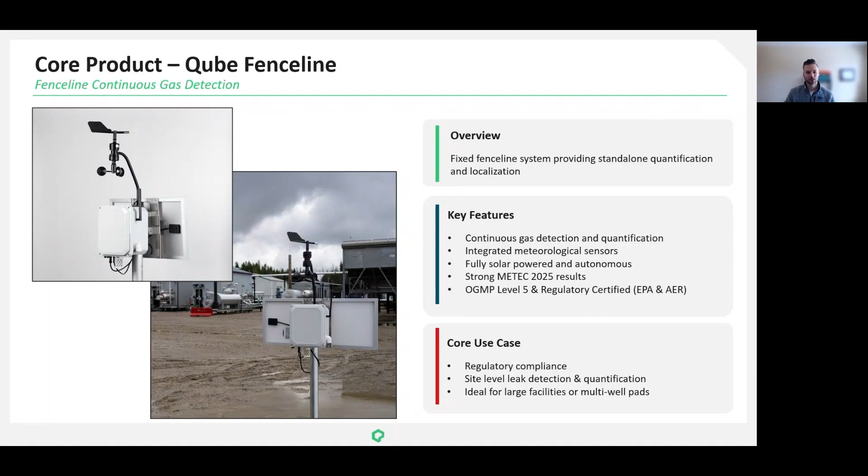So those METEC 2025 results, I don't want to spend too much time on this. We have blog posts and a lot of other resources that dive deeper into this, but at a high level, the three key things that we think help drive home the performance of the model is detection. Do you detect gas through time? So the METEC 2025 results were over 3 months.

It was a very challenging release. They did 0 to 20 kilogram per hour release rates, and at certain points in time, 8 to 10 concurrent and simultaneous releases. So how we did on detection, we hit over that 3-month period, 98% of the time we had the correct detection - that was either a true positive or a true negative. And that's what that bottom left graph shows, our breakdown of time through that 3 months.

So detection is great, but you then need to be able to localize properly, which then feeds the quantification accuracy. So in the localization, we also scored very well. We had 97% localization to the group level.

And then finally, on the quantification side of things, across that 0 to 20 kilogram per hour rates, we compared our estimations for those rates versus ground truth. And what you can see in that graph on the bottom right, that's the distribution around the ground truth for our predictions, and the blue dots are mean. Across the board from the 0 to 20 kilograms per hour, we were within 1 standard deviation of error. So again, really strong results. We have a lot more resources that dive deeper into this.

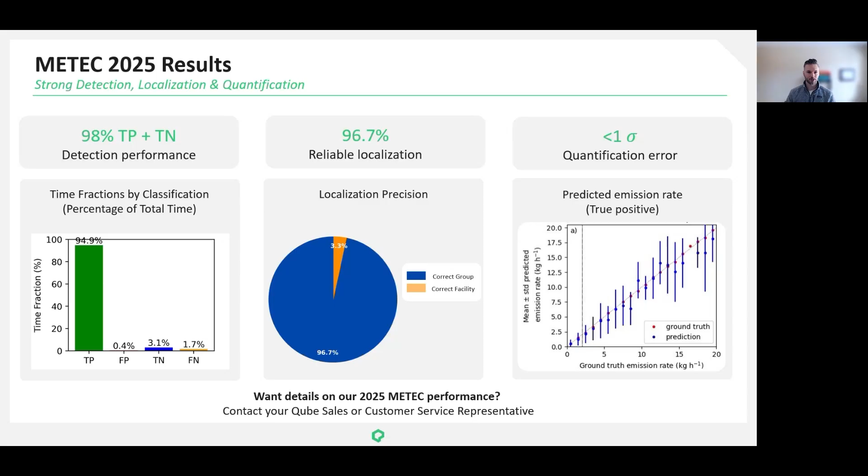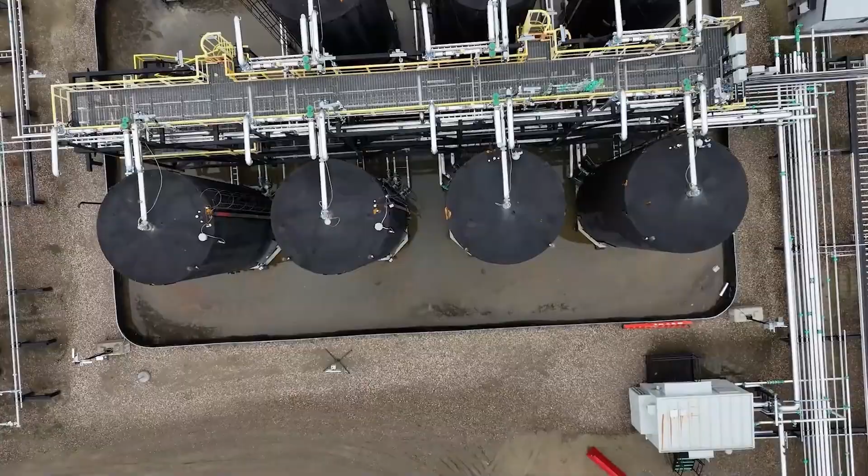All right, so new products. The other product that we've recently been marketing and deploying in the field now is our Qube Lite. Some of you might be familiar with this product. This is a source level continuous methane detection device. It's intended to be put directly into your facility around high value or high critical release points. Key thing with this is it's a compact methane detector, so methane only. It does continuous monitoring, and it's intended to be deployed right at critical sources.

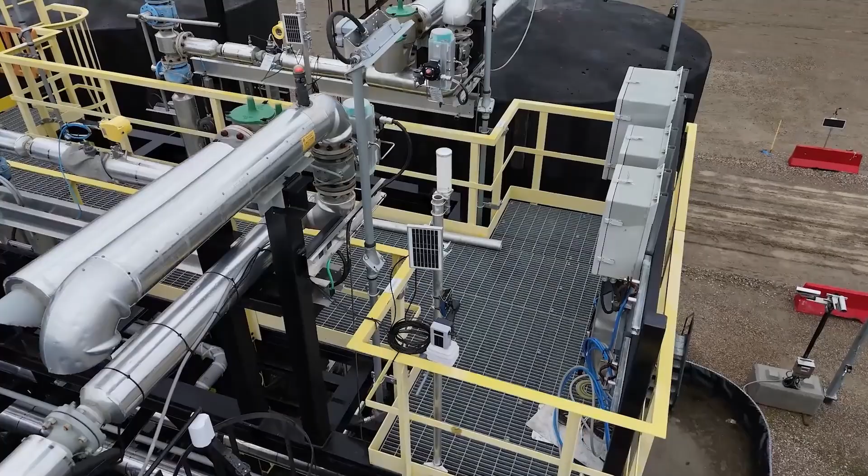So for that to be the case, it has to be intrinsically safe. It's C1D1 rated. It's standalone and autonomous, so it's solar powered, and it's extremely low cost. So again, this device's primary use case is for tank venting or single well sites - marginalized sites where maybe it wouldn't make sense to put a Qube Fenceline. This is where the Qube Lite could shine as well.

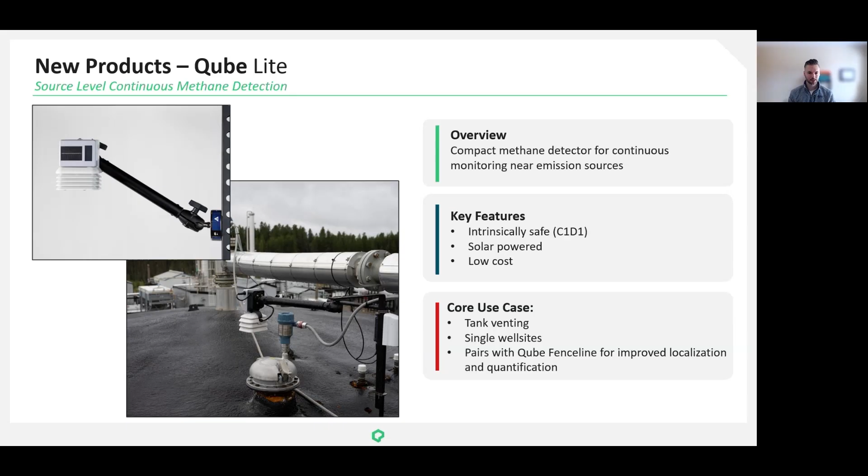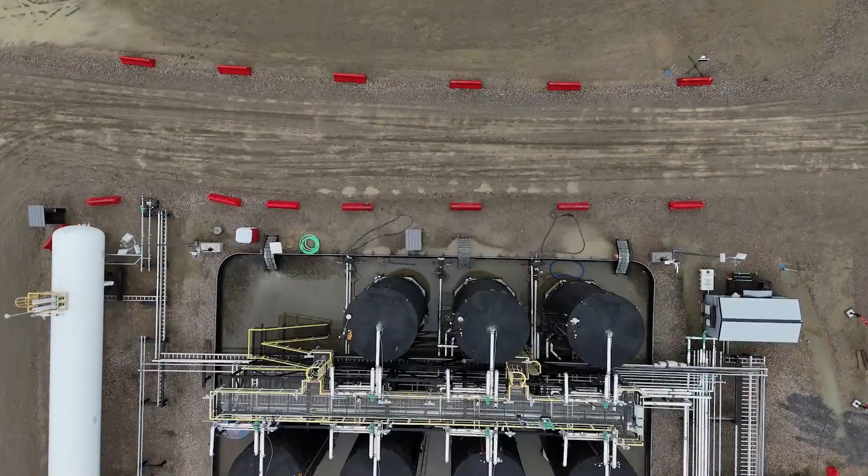Now, again, it can be a standalone device for detection of just key sources, or it can be paired with our Qube Fenceline, which we're currently in the process of rolling out a model that will utilize both the Qube Lite and the Fenceline for quantification and localization.

Our next product is our Qube camera. This is a relatively new product we just came out with. The key thing on this camera is it's non-OGI, non-thermal - it's a visual detection only camera. The main purpose is to provide visual context across your site and identify activity and events going on. It's an HD camera, 1080p resolution.

It can do periodic scheduled events or event-triggered capture. It has an AI model that can detect certain objects of interest, such as personnel, vehicles, flaring, and so forth. The key focus is that it's standalone and solar powered, so it can be deployed anywhere on your site very quickly and easily.

The main use case is monitoring your site activity - any access, flaring, trucks, personnel, truck out. But it also pairs well with our emissions detection products, and it can help provide additional context to emissions, or what was going on at a site during a big emission. We have some examples that show this.

Lastly, this is a very new product that we're in the process of developing - I don't think we've marketed much on this at all - the Qube IoT sensor network. These would be very low cost process sensors that can be installed at remote sites and enable remote SCADA-like monitoring through a cellular gateway.

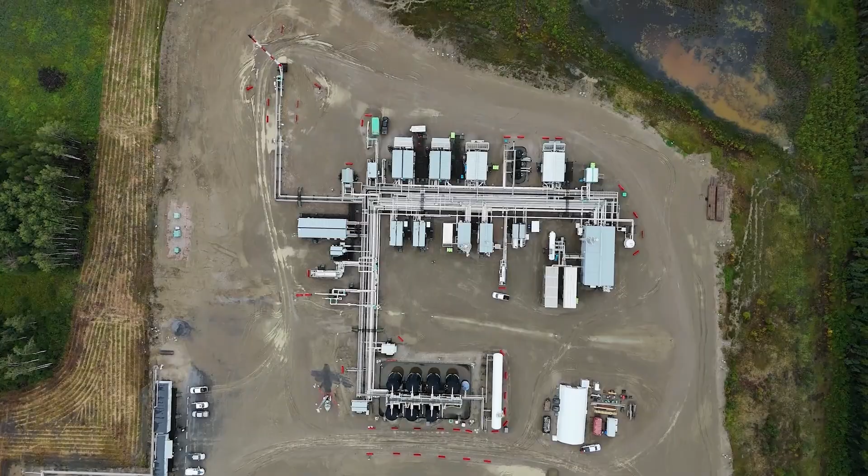They're very low cost and can provide near continuous process data. These sensors will focus on pressure, temperature, level, and vibration to start. They're intrinsically safe, so they're C1, D1 rated. The communication is Bluetooth between the sensors and the gateway, which uses cellular to the cloud. Multiple sensors can be connected to each gateway.

This data would integrate with the Qube platform, can be visualized in the platform or pulled via export or API. Further down the road, the gateway is compatible with several other communication types and sensors - not limited to those four we mentioned, but it can communicate with Bluetooth, Modbus, UART, I2C, or digital analog. So a lot of opportunity to connect with various types of sensors.

The way we view this core use case is those marginalized assets where traditional instrumentation is not cost effective. These devices can monitor your tanks, compressors, pumps, your wells, and focus on monitoring equipment run status, normal operation, and especially venting. Pressure is a great indicator for releases or venting, so it can be a great tool to provide indication of a vent going off.

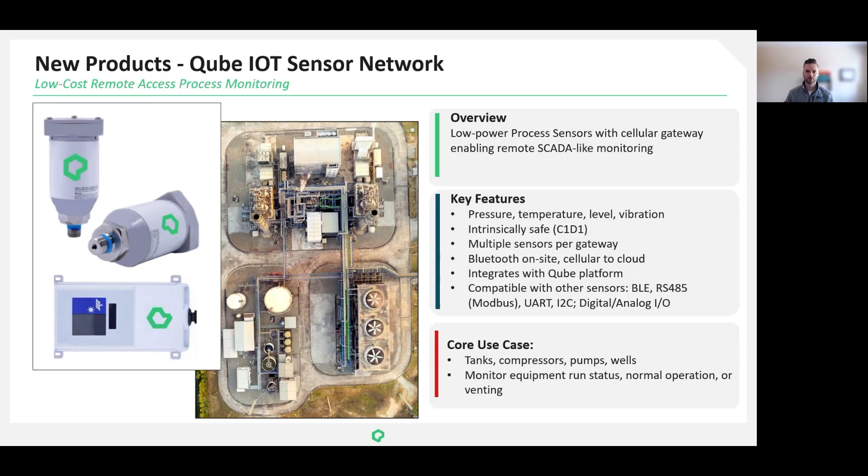Okay, so the next thing I'd like to jump into is our platform. I'd like to showcase a couple examples of how our products work. This is our demo environment. First, I'm sure some people might not be familiar with our site dashboard, so I'll do a quick overview of that, and then jump into an example that showcases the Qube Lite and the fence line together.

This is a test facility - a real natural gas facility that's allowed us to deploy our products and test their performance. On the site dashboard, the first thing you'll see is a map in the top left corner. That map has a drone image overview of your site, and on that image we overlay sources and our devices.

The sources are these black dots, and you can see them all over the site - these are the sources we've identified. The colored icons are the Qube devices. There's a lot of Qube devices here - this wouldn't be typical for deployment, but we've put so many on this site just for testing purposes with this test facility.

On the map, you can see these icons on the top left - these are icons that allow you to improve the visualization of the site. For sources, I can toggle on source icons to see what types they are - these are all tanks, these ones down at the south are compressors, and these are separators and so forth. I can also toggle on device labels, so if I'm looking for a particular device, I can toggle these on and off.

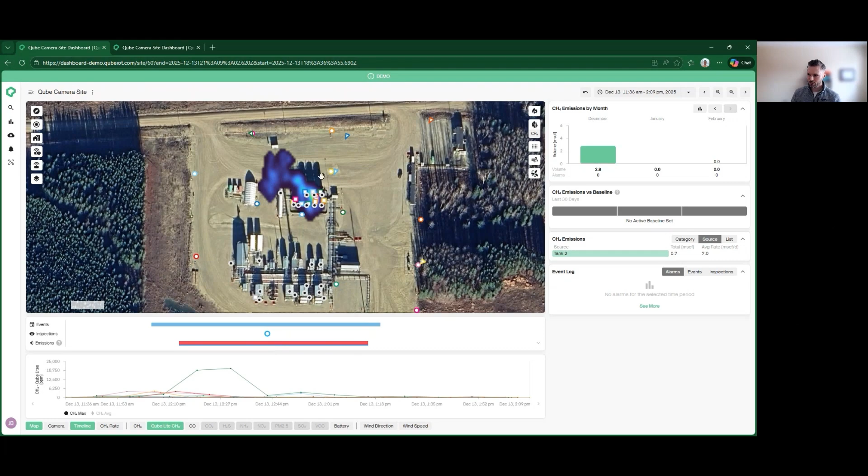The next thing you can add are third-party inspections. For this site, we have an aerial inspection, shown by this blue dot. If I hover over it, you can see the plume that was provided by the aerial provider. You can upload your aerial inspections, your KMZ files, or images, and we can overlay and show them on the platform. You can persist that or toggle it off, and you can also go in and edit the details of that emission.

And then lastly, we have the emissions. This is the output of our quantification model. Anytime there's a detection, we create an emission event, and those time-bounded events can be summarized and rolled up into this timeline view.

Underneath that, we have buttons that allow you to toggle on more time series views. If you have a fence line product, you could toggle on the CH4 rate. This is the quantification model output through time, with various averaging periods you can view the data. Then we also have the raw data for the devices. I'm showing the Qube Lite CH4 because that's the example we'll go into, but you can toggle on the CH4 for the fence line.

You can see the actual raw data that was detected through time, same with the Qube Lites. Any of the other gas sensors installed on the device, you can toggle them on. You can also see device battery, wind direction, and wind speed from the fence line devices.

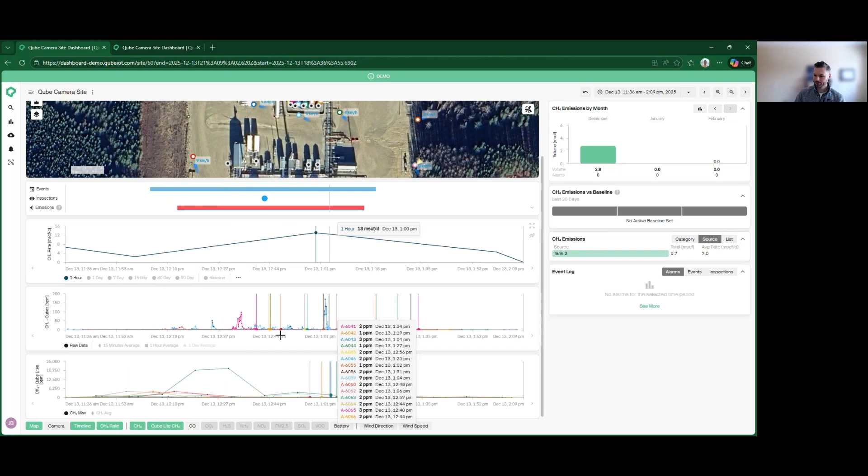On the right side, we have rolled-up widgets that show the summarized emissions performance through time. The first is our emissions by month, your total emissions by month for the site. Because this is a demo environment, we only have one month shown, but normally you'd be able to move through time and see your other emissions volumes per month.

We have an emissions versus baseline widget. If you set a baseline for a site, which we always recommend, this shows you the performance of your emissions relative to baseline for the time period selected. Lastly, we have an emissions rolled-up summary table, which groups your emissions by source groups, like tanks versus separators, compressors, and so forth, specific sources, and then just a list of your emissions.

And then lastly, we have the event log. This is essentially the event timeline down here, shown in tabular format, where you can see the specific events. You can come in, open, and see them. You can edit, change the events, and you can add a new event in here if you want.

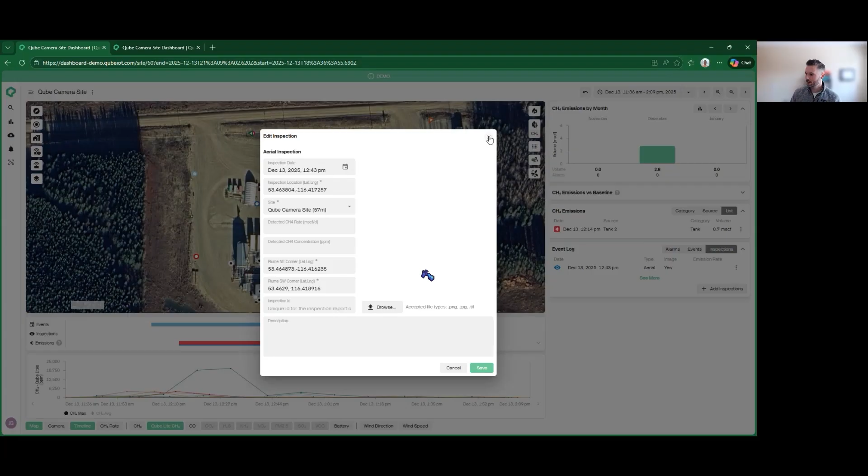Inspections as well - you can come in and see your inspections, edit your inspections, and add new inspections. So you can add a new aerial inspection: load a KMZ file or manually add an aerial inspection with all the information in the plume and upload your aerial image. Or you can add survey inspections, OGI or AVOs, add details on whether a detection was found, and add an Excel file.

So that's the overview of the site dashboard. I know that's quite a bit, but if you'd like to get more info, you can always reach out to your Qube customer service rep.

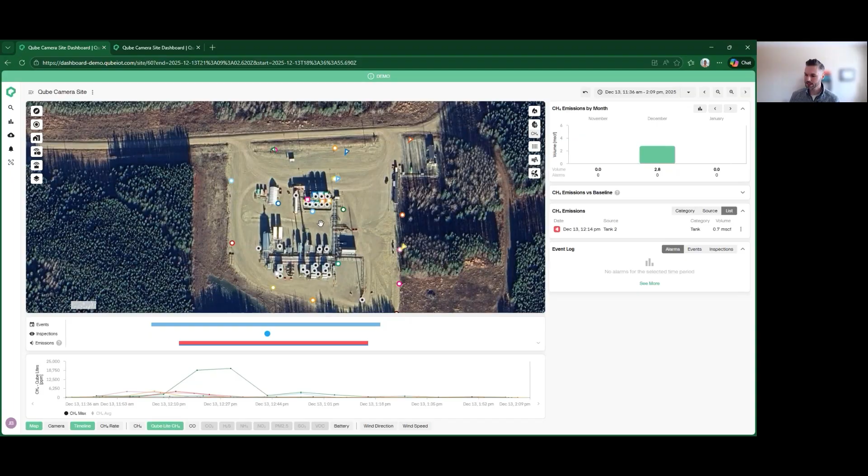Now I'd like to dive into a specific detection scenario at the site. The example I'm focusing on is a release from the tank farm, specifically this red emission event. What I want to show is if you were using Qube Lite on its own — obviously we have all the detection technologies, but if you were using Qube Lite alone — there's a release from the northeast on these tanks.

We have several Qube Lites on the tank farm. What you can see here from the Qube Lite PPM chart is a clear pickup of concentration across the Qube Lites on the tank farm.

One of the key features on the visual on the top right is we can turn on something called concentration roses. This lets us visualize the raw data of CH4 detection from the devices. The rings around the Qube Lite show the concentration hits, and the magnitude is shown by color. What you can see here is that during this time period, we had several detections on these northeast corner Qube Lites, and the PPM concentration also aligns with that.

In this instance we didn't have an alarm set up, but you are able to set up alerts on each Qube Lite device based on concentration. So if you had Qube Lite only, you would have been able to alert on this PPM detection from the tank release, generating an alarm that could send a notification to your operations teams. This would be PPM only, but it still would have captured the detection.

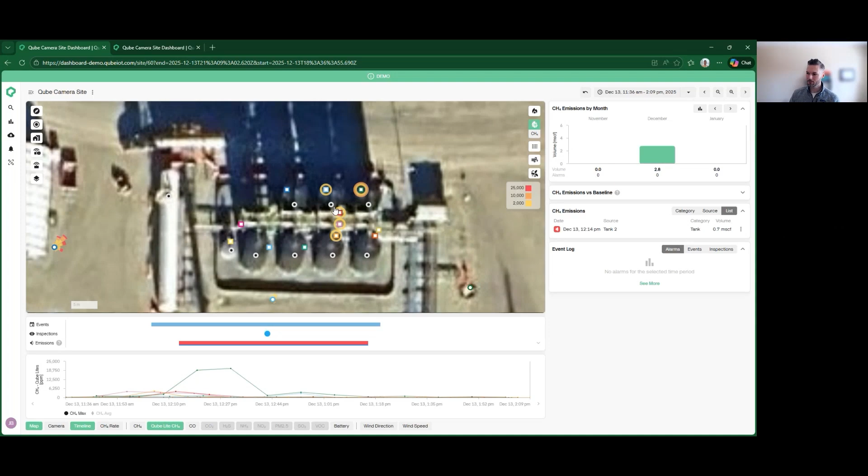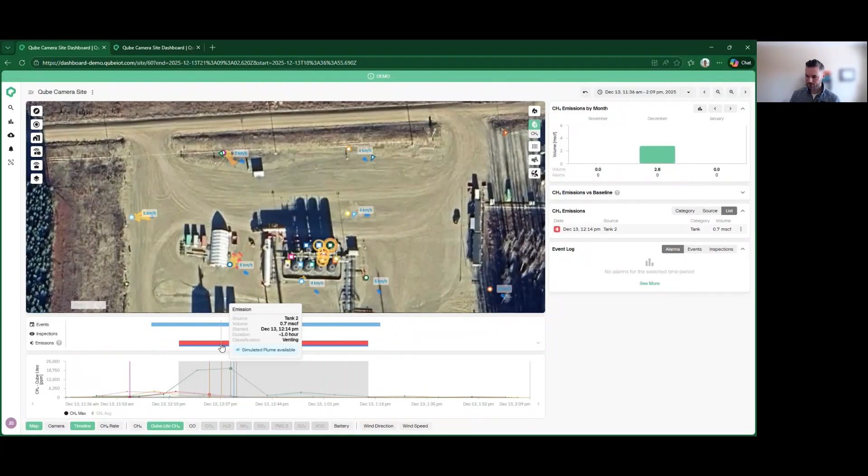Now zooming back out, I wanted to show how our fence line also performed in conjunction with it. If I turn off our CH4 and turn on our fence line PPM, what you can see here is we also detected fence line concentration throughout — these are the circular devices on the outside perimeter of the tank farm, and they also picked up that release.

On the concentration roses here, the fence lines show these triangular kind of circles around the devices, which indicate the direction they were getting concentration hits, while size and color show the magnitude. One cool feature from a UI standpoint is you can hover on these and it projects the cone further down on the site.

What we usually recommend is you click and toggle these on, and you can toggle on the top cones from all the devices that had hits, which were these western devices. You can see where all the cones overlap — that's typically where we're going to localize to.

The cool thing is if we turn on the heat map, another feature we have at the top right, it visualizes where the emissions were localized on the site. You can see that's exactly what happened — we localized to tank 2 with our quantification model.

So fence line on its own was also able to detect the event, same as the Qube Lites, and it quantified and localized to the exact same location. So both products completely standalone were able to quantify and localize to the tank farm.

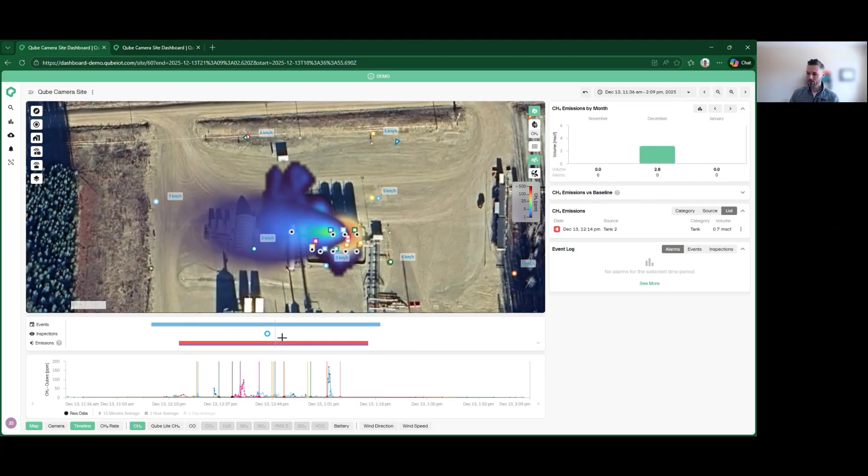If I toggle on that inspection from the aerial flyover, it lines up quite well with that plume. We think all of these features combined together give really great context to the operational team to understand what the Qube model was doing and what we think was going on at the site. Two different products detecting the same thing. We think that's a really great example, showcasing how the Qube Lites on their own can work, how the fence line on its own can work, and how they all work together in conjunction in the platform.

The next feature I want to go over is an example of our camera. In this example, I want to zoom in on the tank battery or tank farm. We have 3 emission events that you can see in our timeline. These emission events were all localized with the heat map showing as tank 4, to the west of the tank farm.

When we talked with their operations teams, there was no clear process data or indication that there would be an emission from tank 4 or from the tank farm, so we were kind of stumped on what was causing the emissions. Now, what we always say is we detect very well, so if there are concentration hits in detection, there is something going on at the site. We needed additional context, and that's where the camera came in extremely handy in this example.

If you have cameras installed at your sites, these triangular devices on the map, you'll have this button available to toggle on the camera timeline. If I toggle it on, you'll see this series showing a row per camera. This site has 5 cameras, and each dot is an image taken by the cameras. We can program the cameras for routine scheduled images, and they also do exception-based detection based off objects of interest. The spaced out dots are scheduled, and the more concentrated dots are periods of interest based on object detection.

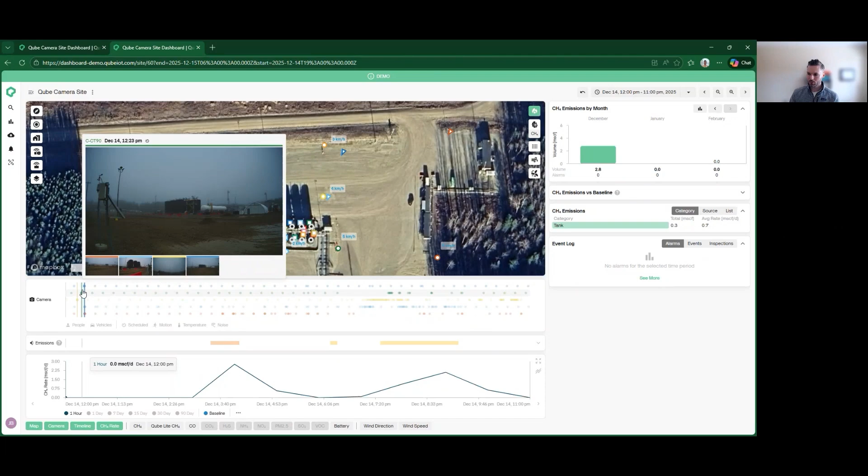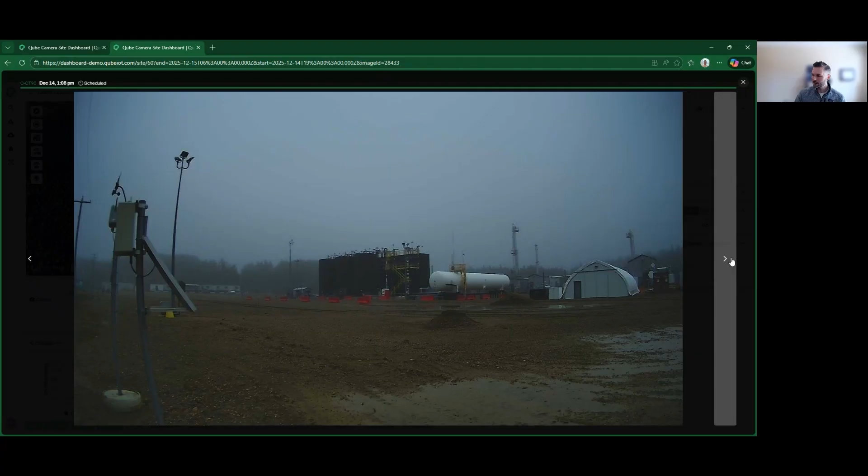If you hover on the camera, depending on which one you're on, you'll get this view of images from the cameras through time, and if you slide across you get the updated images. You can also click on the timeline and it'll pull up the camera you were on, then get a more blown up view of the images, which you can go forward and backwards through. Specifically in this instance, this is a lot of images to go through.

So you can filter to events of interest, and hovering over it brings to the forefront those images that meet that criteria. In our example, what stands out to me is I want to focus on the vehicles. Hovering on this, I can click to persist that view. The first thing that stands out is the light blue camera, looking at the tank farm. The second thing that stands out is all of the images from the light blue camera seem to align with those emission events.

When I hover over this, the first thing that stands out is there was a truck during every single one of these emission events. If I hover over this one, another truck. You can see the model is identifying it as a vehicle. There's clearly a truck at the truck out. Similarly for this much longer event - you'll have to bear with me, my computer can be a bit slow - but there's another truck.

So this additional context from the camera allowed us to relay that info to operations, which allowed them to identify that there was a small vent tank to the east of tank 4 that relieved during truck out. I had no process data on it, no indication, really no way of knowing if it was venting or not. But it allowed us to identify that there was in fact venting going on during the truck outs.

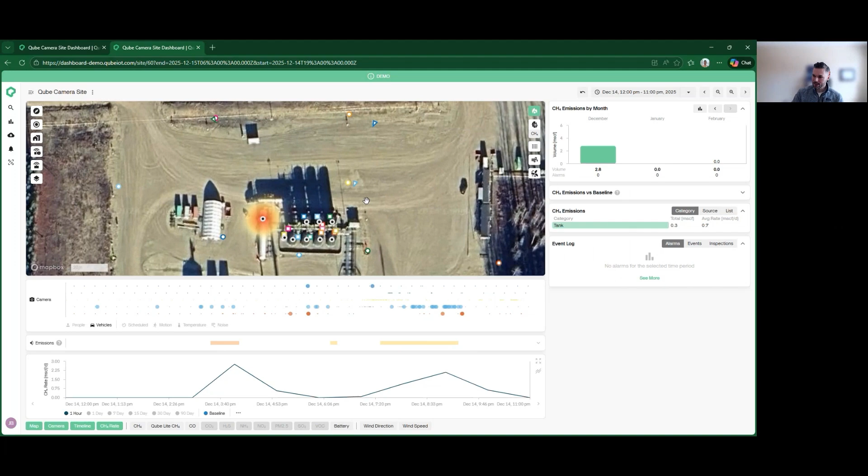So again, we think this is a great example. The cameras on their own could be standalone to just indicate when you're having trucks arrive at your site, or when there's vehicles or access occurring at your site. But again, when paired with the emissions data, it can add that extra bit of context to explain why there are 3 emission events that were previously unexplainable.

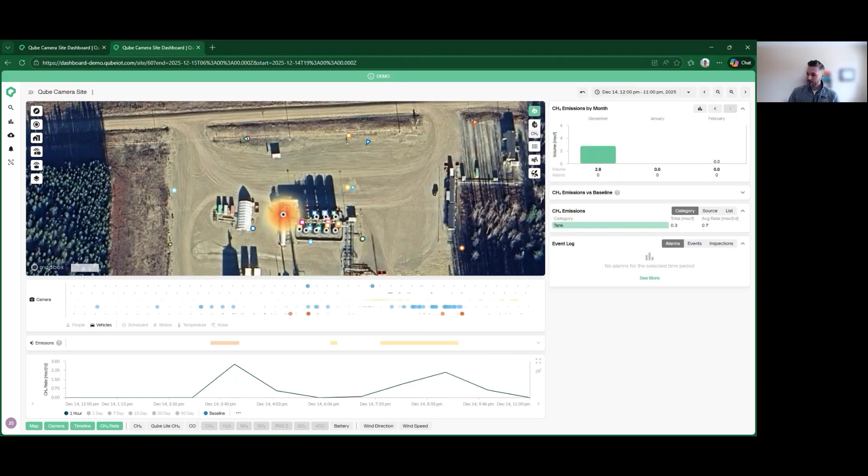So that's it for our platform demo. I'd like to now jump back into the presentation and go over a case study that ties this all together.

So again, this is another example from this test facility. This one combines all of our data plus process data at their site. This is an upstream natural gas processing facility. We have the 3 core products deployed: the fenceline, Qube Lite, Qube Camera.

And at this site, the example we're going to go over is a slugging event that happens at the plant. For those that aren't familiar, a slug is a plug of liquid that can come into the inlet of a plant. Typically you have gas and liquid flowing together in the inlet. Eventually you can sometimes get a large plug of pure liquid that hits a plant. These can be very hydraulically significant to a plant and cause a major upset. The extra liquid can cause a lot of liquid flow into the tanks, which can cause extra vapor and then potential venting and flaring. And that's exactly what we see in this example.

So they experience a slugging event from 1 a.m. to 1 p.m., and then they experience tank farm venting and flaring. And then what we want to focus on in this case study is the detection and response.

So we were able to capture the full event timeline. We used their process SCADA data to provide root cause insight into what caused the event, and we were able to diagnose and troubleshoot the event fully remotely.

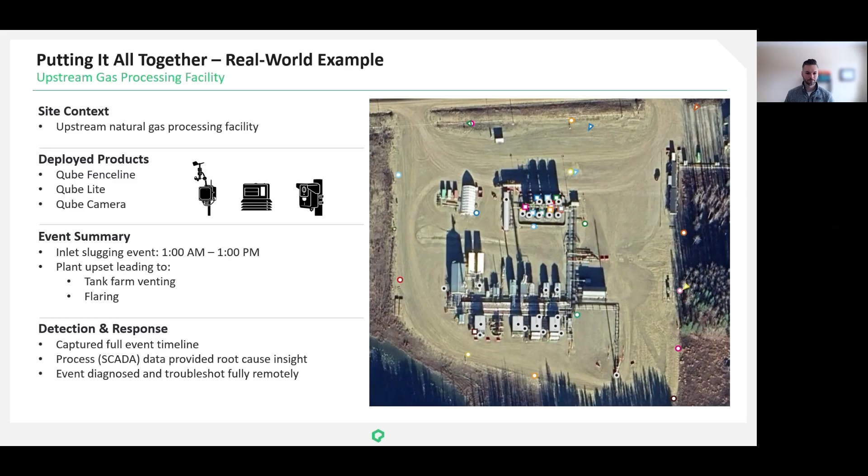So the first thing I want to go over is that process signal. Again, every major event at a plant, there's so much process data and SCADA data that can give you information. The key challenge is understanding what variables to look at to give you that information. I would call this the fingerprint of the event. Most of these events, if they reoccur, you would see the same signal in the data.

So for this specific example, to define the slugging event, we focused on 4 key process variables. The first item is the inlet separator water level. With a slug of liquid coming into a plant, you're going to get a lot more extra liquid and water into the plant. So you'll see that in the inlet separator water level with how frequently it dumps and just how unstable it can become.

The next item: extra vapors getting into the tank farm from the separator will feed the VRU suction pressure. So every tank farm has a vapor recovery unit. And if excess vapors get into that unit, its suction pressure can change or become unsteady. So monitoring that can be very helpful.

Next, gas plants are designed with a last line of defense to relieve any excess vapors or pressure to the flare system, and that's usually an indication of a plant upset. A very large slugging event would typically result in a plant upset, and you can monitor the flare flow to see if that's occurring. A slug is also a very hydraulically significant event. It can block off gas flow to the plant and cause major pressure swings, so a gas plant should run with pretty steady pressure profiles throughout. Monitoring the inlet separator pressure is a great indicator of a plant upset or a big slug.

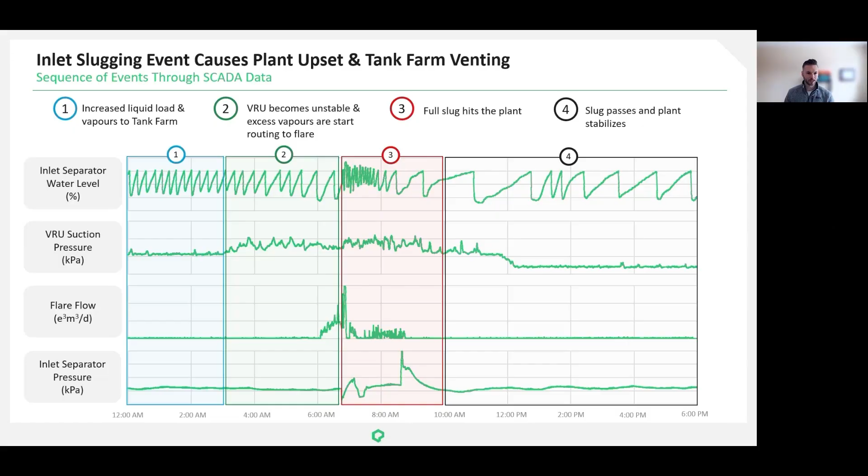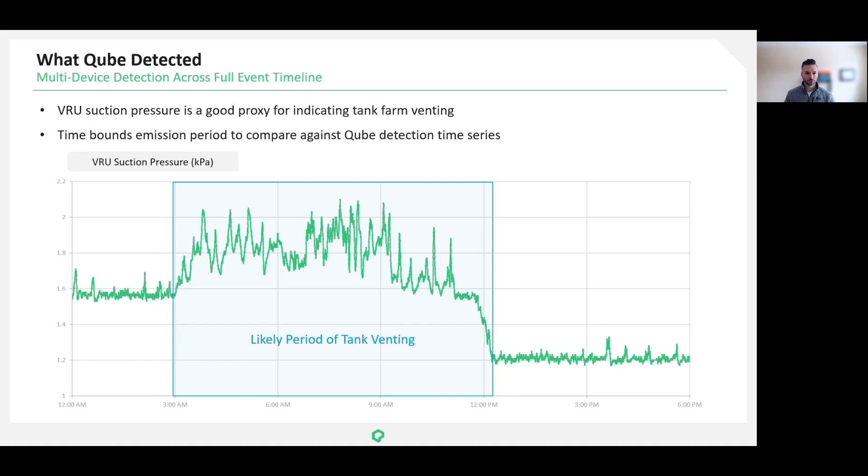In this example, we like to use the VRU suction pressure as a good proxy. The VRU suction pressure becoming unstable clearly indicates vapors in the tank farm, which could clearly indicate a period where there may be venting. So time-bounding the period where the suction pressure becomes unstable, which I've highlighted in blue, gives the likely period of tank venting, and we can use that to compare against the Qube detection data to see how Qube did.

So first, the first thing we'd want to look at would be the tank top Qube Lites. They're the first line of defense. And what you can see from the concentration, this is directly from the platform. The tank top Qube Lite ppm aligns almost perfectly with the VRU suction pressure instability. So clearly there was venting during this period, and the Qube Lites were picking it up. Specifically the slugging happened around 6 a.m., just after 6 a.m., and that's where we see the highest concentrations off the top, during the period of highest instability and highest vapors in the tank farm.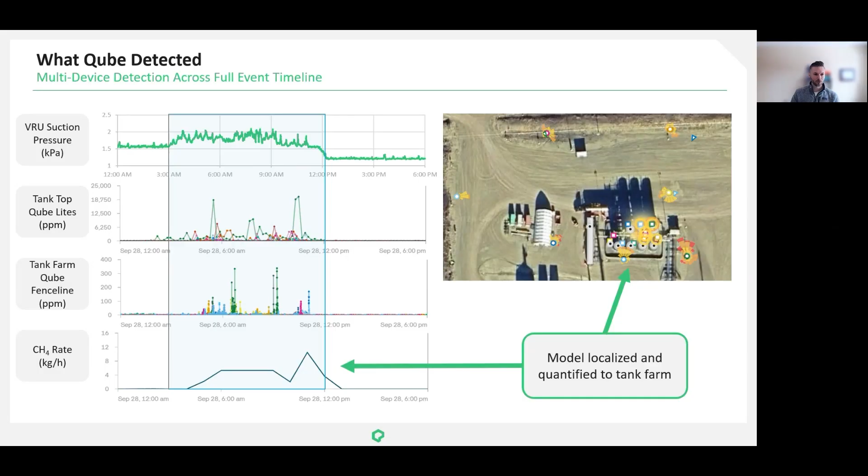So again, full detection and quantification throughout the period of venting. And then lastly, we had a camera focused on the flare. Throughout that whole period where the flare flow was going, that camera detected flaring events, which you can see in the image below, which is an image directly from our cameras.

So we really like this example. We think the beauty in this example is using the process data, we were able to fully define the event, what was happening at the plant. We were able to predict when we thought there'd be emissions, and then the detection data captured those emissions for that time period. And then we've had visual confirmation with our camera.

Obviously, this is a fully manned site. So they would have been able to have this information themselves, but you could see the value of this at a more remote site where having this context relayed remotely could prevent potentially a site visit or field visit from an operator. And this is why we're so interested in trying to get more coverage of process data to get that upstream context of what led to an event.

And then it's not a stretch to believe if you have all of that information, that event fingerprint, you could potentially automate those insights. So this was obviously reviewed and analyzed by myself, but you could absolutely see this being done automated and sent through AI.

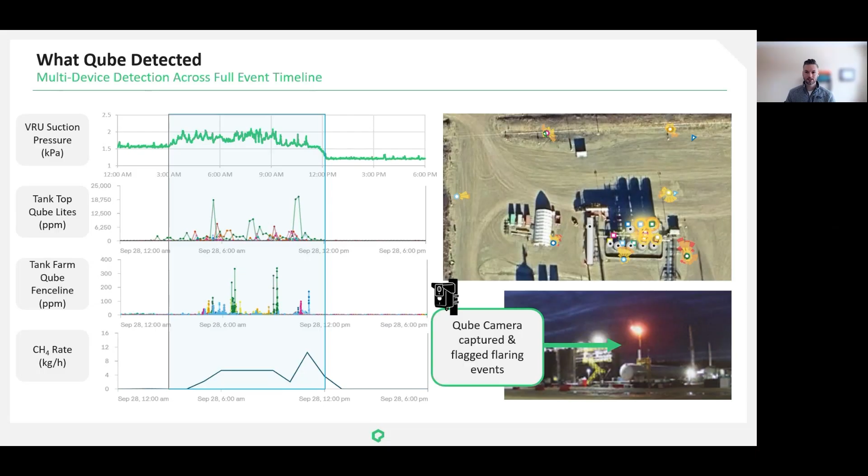So why does this matter? In our view, this provides greater insights in one platform. As I mentioned, it provides full event visibility. You go from deviation from your process to the eventual release and then stabilization. Emissions are accurately localized, quantified, and correlated to the process data. And then that process data helps us identify the root cause remotely. Ideally, this results in no on-site troubleshooting required.

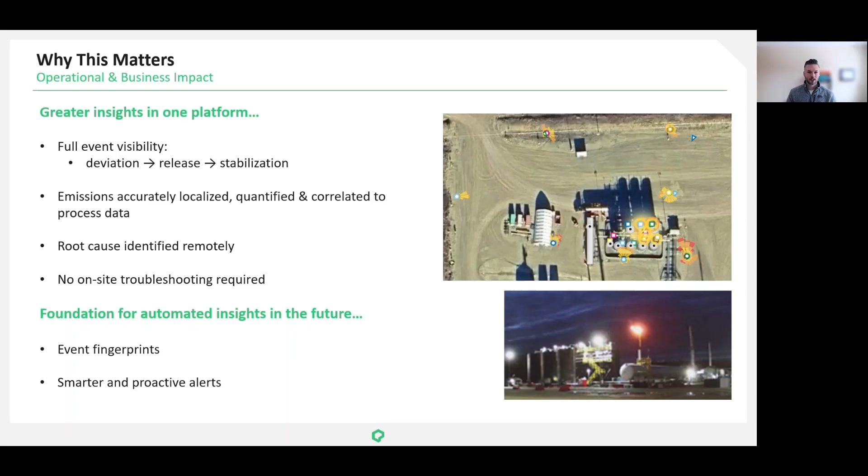And then, as I mentioned, having all of this data and context opens the door for the foundation for automated insights. So identifying event fingerprints and then having automated and smarter and proactive alerts that can flag based off of that event context.

So in conclusion, just to summarize, Qube, we're really focused on building modular products, and we really want to focus on that operational value and emission insight, not just quantification. We want our products to be deployable standalone, so depending on your needs, you can use one product if you want, or combined for a better suite of solutions.

The goal here is with this suite of products, we enable flexible deployment, aligned based off of your site size, complexity, or budget. We right-size the coverage without unnecessary instrumentation, so we don't have to over-deploy instruments on your sites. And then the goal, as I mentioned, is greater operational context in a single platform, and ideally driving real-time, clearer decisions with fewer site visits for your team and less operational workload.